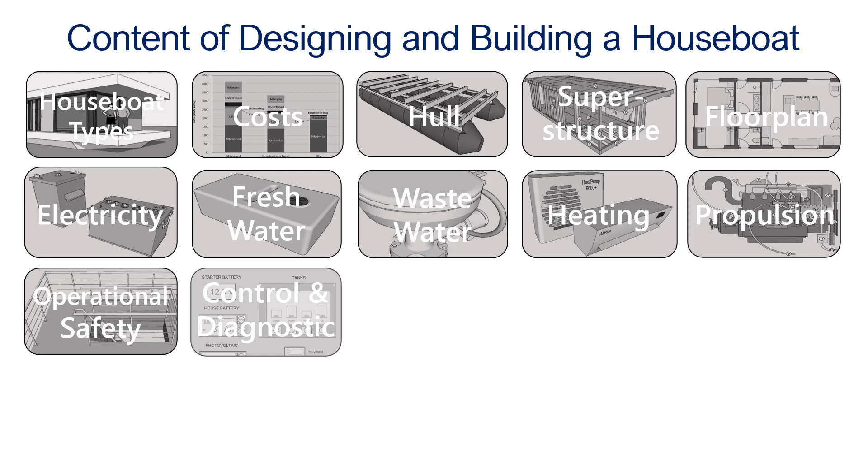So this is just a small presentation about little things I think are helpful. These are kind of the chapters of the book, and today we take something out of the area hull. I want to talk about providing safe freeboard and buoyancy reserve.

So it's all about that your boat is not too deep in the water and you have enough volume in the hull to keep you afloat in all circumstances.

Okay, let's take a boat here with some catamaran hull, two round hulls. It's somewhere, it's floating. Hopefully not too deep, hopefully not too high. If it's too deep, it's unsafe, if it's too high, you spend too much money on the hull.

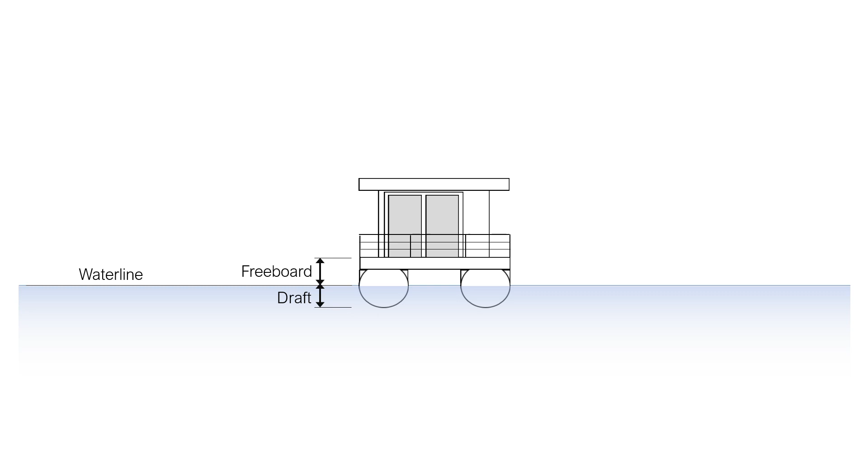So, but how do we find out where it is? We have a waterline. The freeboard is the distance from the waterline to the top of the hull where water potentially can run into the hull and cause it to sink. On the other side, you have the draft, from the waterline to the deepest part of the hull.

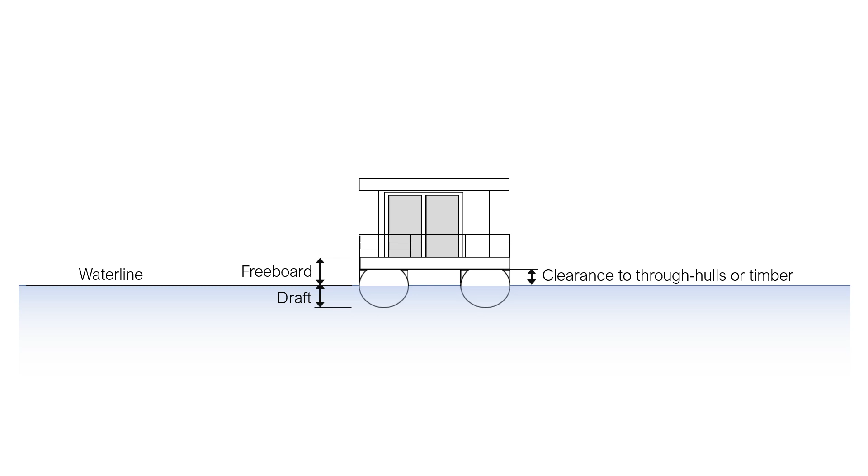Very interesting as well that yes, we don't want to have water running into the hull and into our living room, but as well we want to keep parts that can rot dry. So the clearance to any through-hulls where water can run in, or timber like cross beams, is as well important to consider. How do we calculate the draft and the freeboard?

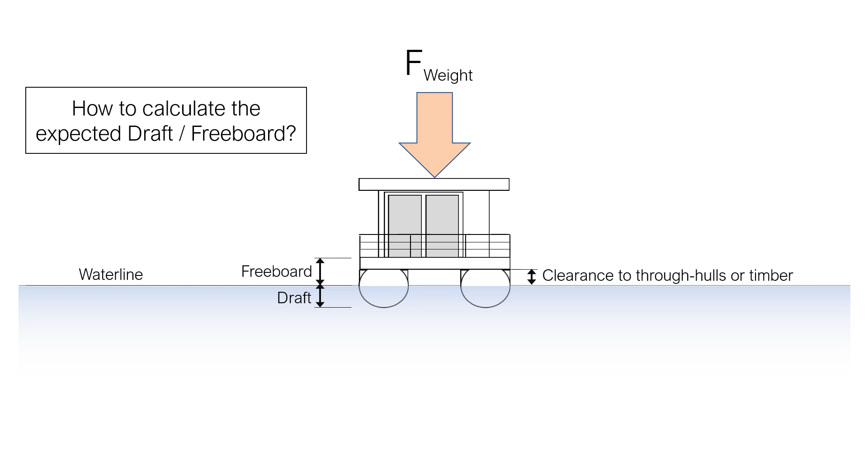So we have the weight of the boat. F stands for force, so the weight force pushes the boat into the water. On the other side, you have the buoyancy force pushing it out. So it's actually two forces, left and right, but for simplicity reasons, we make it one.

It's again a force F, and we call it buoyancy force, F buoyancy. A stable condition, that means the boat is not going deeper in the water, not going higher out, is when F weight equals F buoyancy. Simple, that's it, very simple.

And these forces are calculated in Newton. That's the correct term when you talk about forces. But in general, we make it a bit simplified and we just use the equivalent in kilograms. And 1 Newton is about 0.01 kilograms.

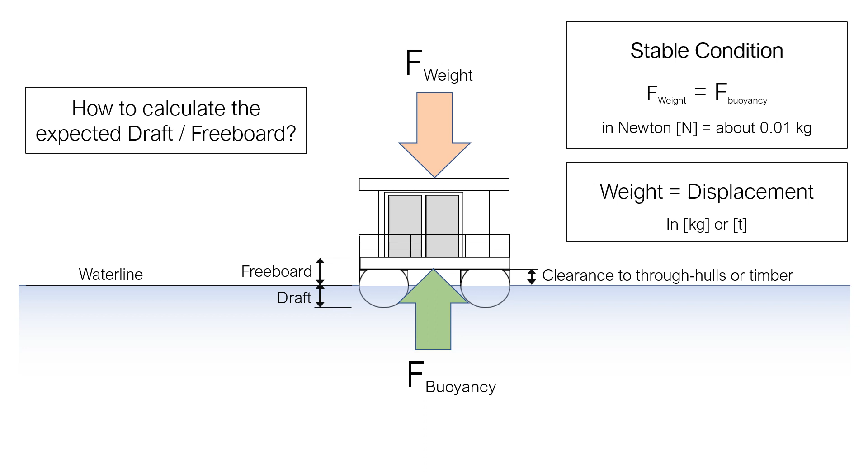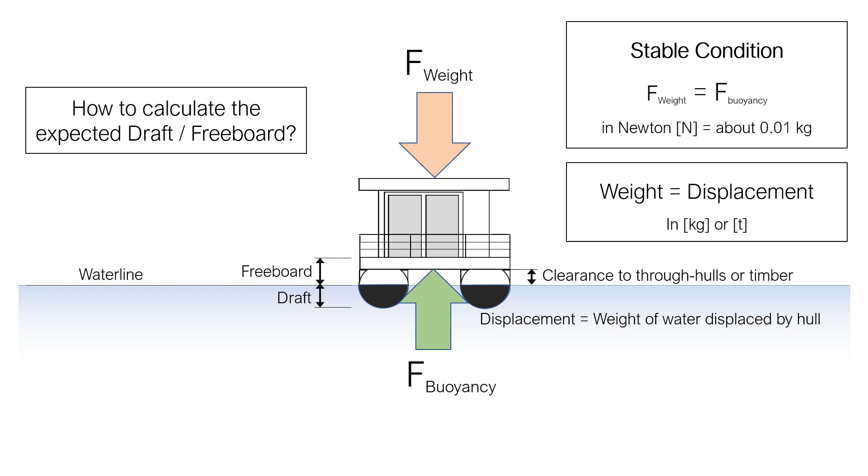Okay, weight is as well called displacement with the boat builders. And it makes a lot of sense if you know how to calculate it, because the buoyancy force is equal to the weight of the water which is displaced by the hull. And that's here visualized by the black part.

So let's focus. We have two things to solve: the weight of the boat and to calculate the buoyancy force. Let's start with the weight.

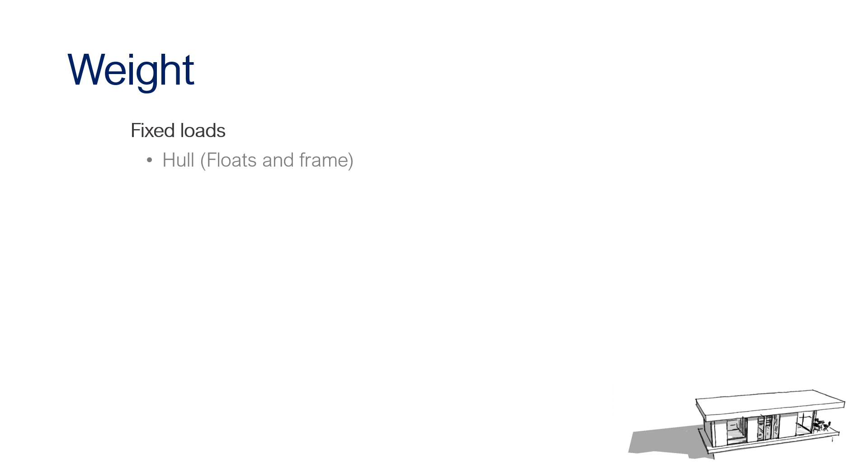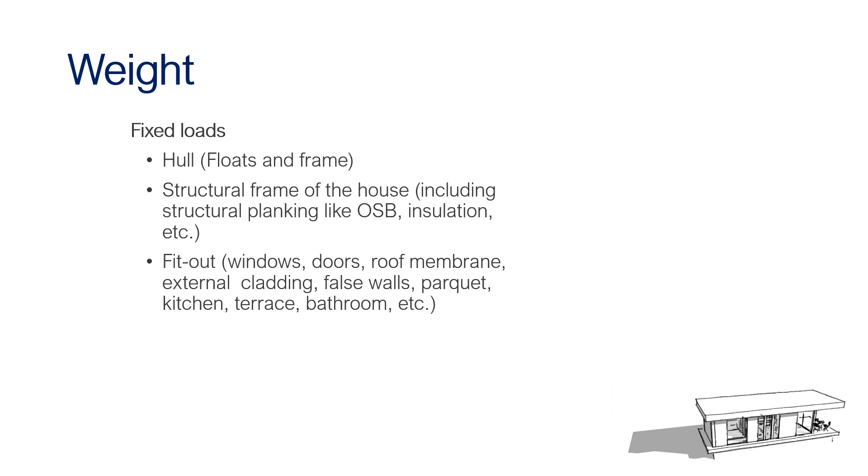We have to consider fixed loads. There's the hull, there's the structure, like planking, the beams, all that, even the insulation, and there's a fit out: windows, doors, parquet, kitchen, and technical installations, engines, batteries. And if you really think about it, there's quite a lot to it, and often things get overlooked.

Talking about overlooked or underestimated: variable loads, passengers. Yeah, that's easy to calculate, maybe average of 75 kilogram per person. Furniture - people underestimate how heavy furniture are. Personal belongings - there's a reason, there's a joke with sailing boats that the waterline gets always moved higher every year because people just put more and more stuff on the boat. So personal belongings is as well often underestimated.

Tank content - think about 1,000 liters of fuel or water, that's 1 ton, has to be considered. Snow, for people who, like me, live somewhere where it can snow, it can be quite a heavy load which has to be considered. So make sure you really have a good grip on how to calculate the weight of the boat. How do you do that?

So there are different ways to do it in a spreadsheet. You can do just a general top level calculation where you just list the main components of the boat and you estimate, or maybe someone who builds it for you gives you the weight, but this is not that accurate. So we have to work with a high contingency.

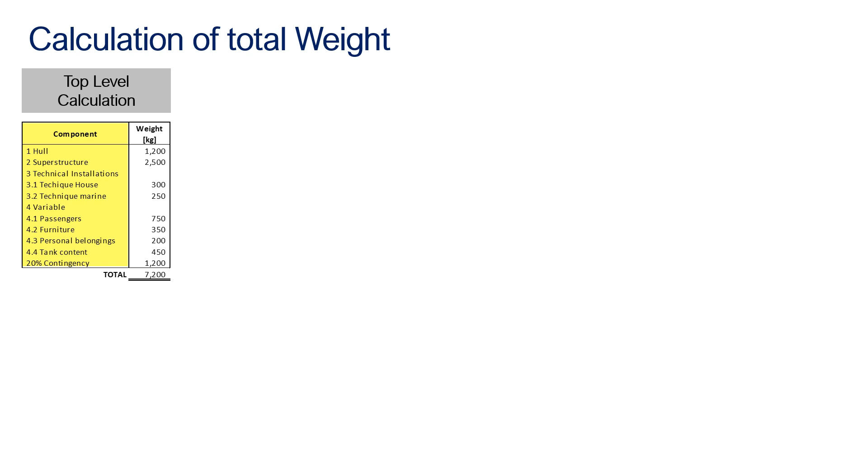For everyone who's really into buying, building, or designing a houseboat, I would really go a bit more detailed with calculations. You have again on the left the groups or components, hull, superstructure, and so on, but you really go down into the parts. This is something I talk about in my book as well. This part list is really important because you have to know what you have to order, so I would include even things that don't weigh that much, just list everything you can think of.

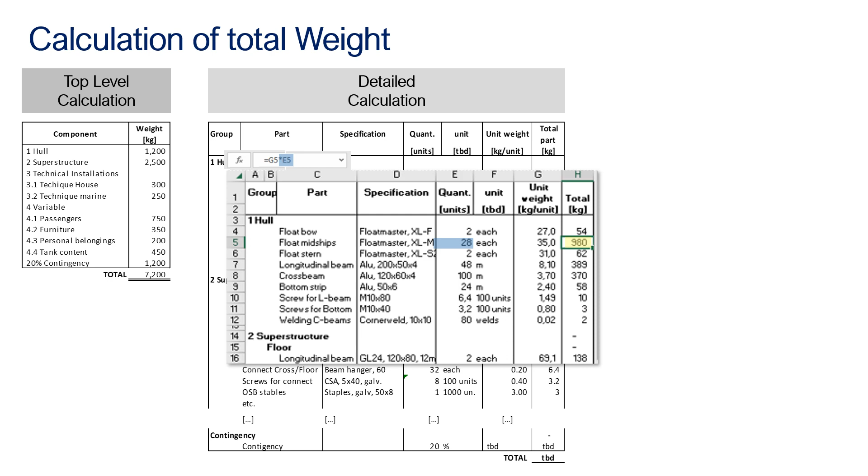Write down the specification, you need it later for ordering anyway. The quantity, unit, so how many units of each, how many pieces or square meters you have to buy, the weight of each unit, and then you can calculate the total of each component or each part. Simple calculation in Excel where the total is just the quantity times the unit weight.

Very simple Excel calculation. You can as well have a mixed calculation where sometimes you stay top level, sometimes you drill down, and you can use helpful numbers. In my book, I calculate for instance the weight of a typical floor, a typical wall, a typical roof with different kinds of insulation, so you can use these measures and then only have to calculate the square meters of roof or walls you have. For internal walls, you can work with linear meters. Whatever it is, don't forget your contingency, because you will surely have forgotten something, and as time goes you get more precise.

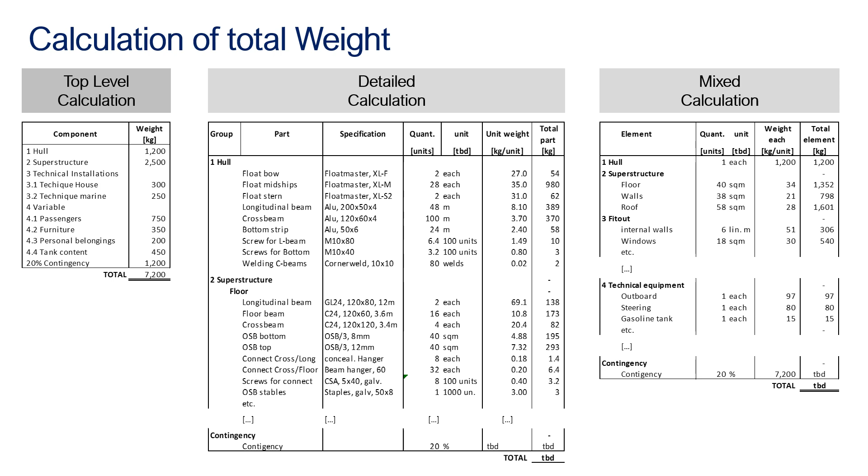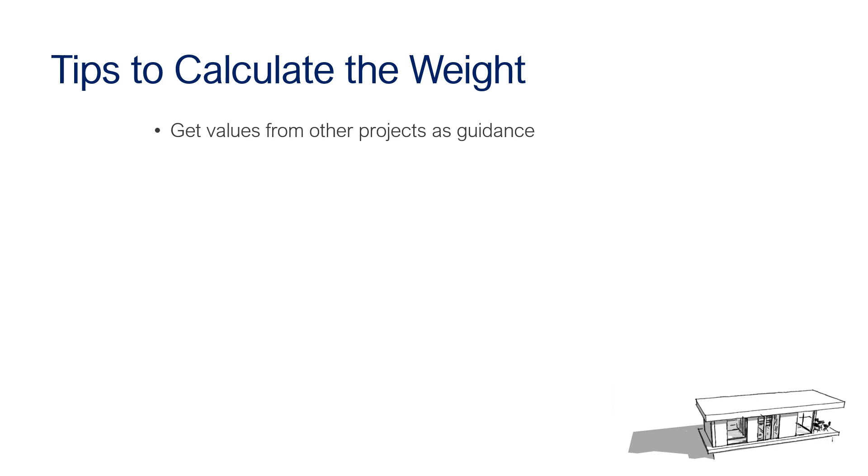Some tips from me: get other values from other projects. If you have a houseboat which kind of resembles what you have in mind, see how much that weighs, because chances are you will end up in the same weight range.

Go through the construction process in your head. Think about, okay, I do this beam, how do I connect it? Okay, I use the beam hanger, I need the screws, okay, insulation, wait, I have to have a membrane outside. So go through it and detail your part list so that you don't forget anything.

Start top level, so even if you don't know exactly how you will do, say, the roof, make an estimate, and as you go just detail the roof beams, the insulation, the roof membrane, and so on. My tip is just include everything. Even if it doesn't weigh that much, later when it comes to designing and ordering, you will be very appreciative that you have a complete list of all the parts of the boat.

And again, don't forget the contingency. Often people think they don't need that much contingency because they're aiming to buy a cheap hull and they know the buoyancy is limited, but chances are it will be heavier, so don't forget your contingency, and rather overestimate than underestimate.

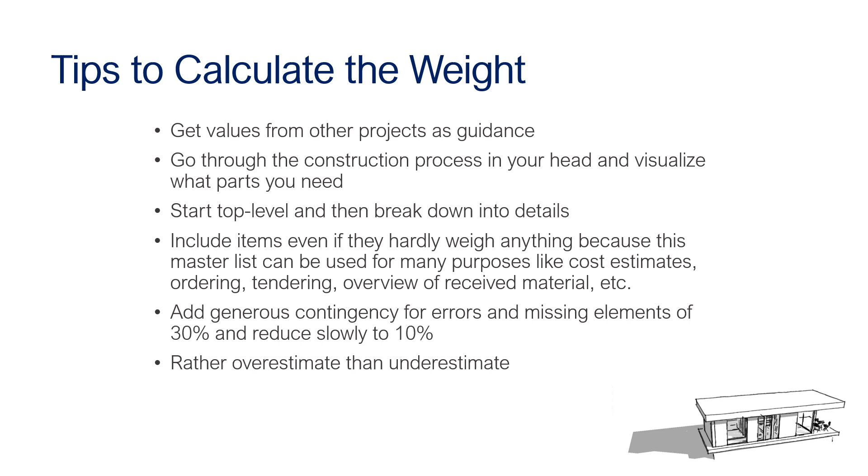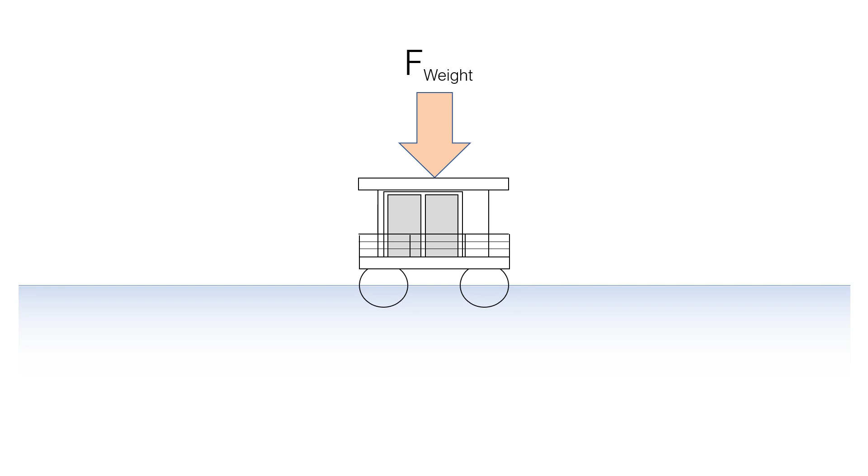All right, so we have the weight force. Now we have to calculate the buoyancy force. But this is a bit of a tricky thing because we don't really know where the houseboat is, how deep or how high it sits. Depending on how deep the boat is in the water, it changes the buoyancy force, so we have to know exactly where the buoyancy is.

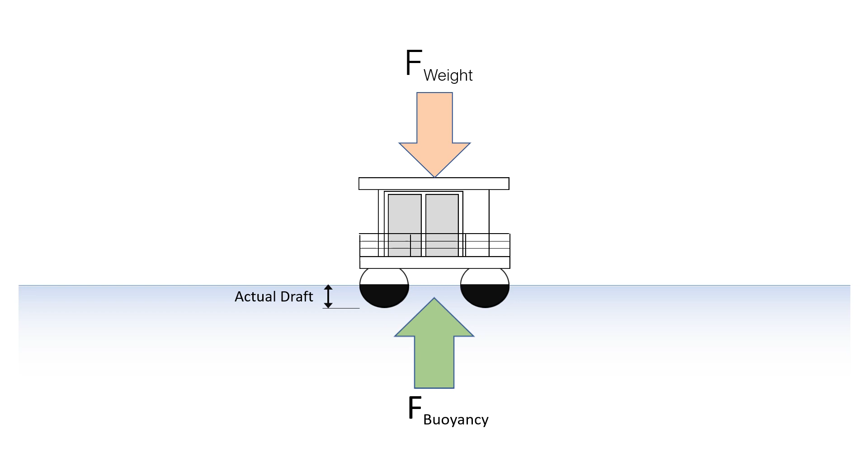Equal to the weight force, and this is given at the actual draft. This is the draft where the boat will later in real life float. So how do we determine the actual draft? Let's look at this hull a bit closer. It's just a round hull, composite, HDPE, something round.

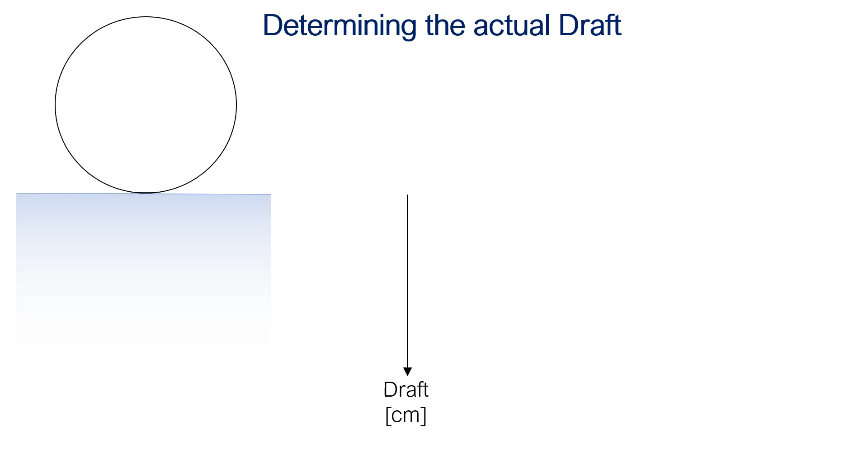So what happens if we now push this hull into the water and observe the displacement? It is the volume of water displaced, and the weight of that water is the displacement in kilograms. Let's do that together. Let's push it in and record the volume of water. First it rises steeply, and now as the round hull gets a bit narrower on top, the displacement rises not so much. It's a critical range, the last 10-15% of a round hull.

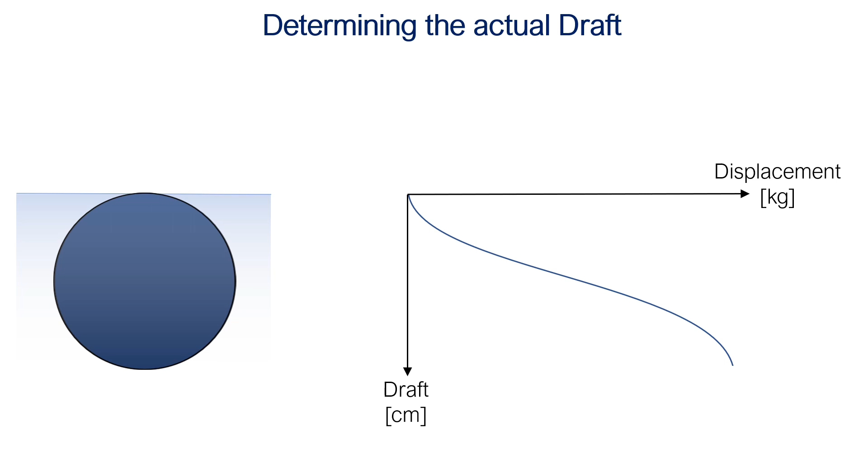So now we have a buoyancy curve, a displacement curve, and if we mark on this axis the weight of the houseboat, go to the line of our displacement curve, then we find the actual draft.

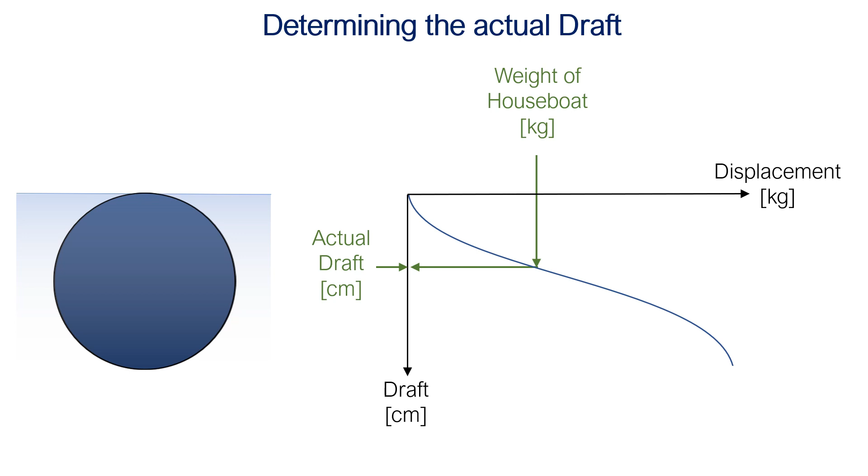So the thing is, we have to create a displacement curve. There are a few ways of doing it, and I will run through all of them.

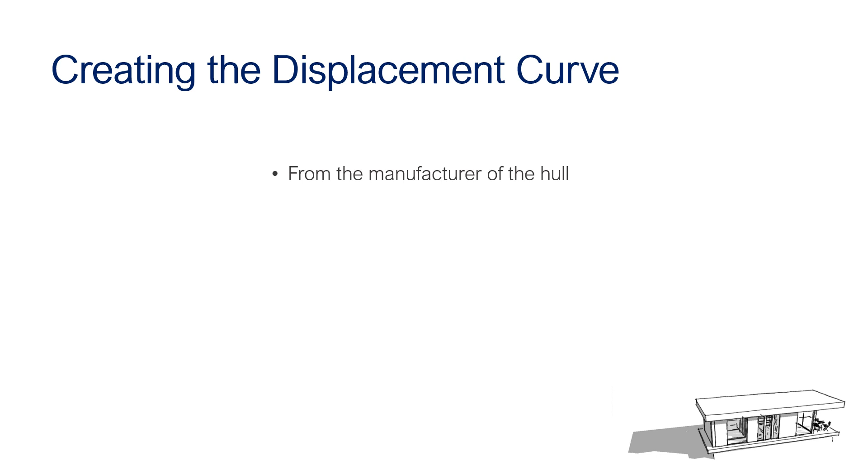You can get it from the manufacturer. If you have a prefabricated or a designed hull, they will give you a curve. You can calculate it from a 3D model. You can measure it if you have, for instance, an existing hull. You can calculate it from fixed dimensions. You can calculate it by parametric calculations. So I will go through all of that.

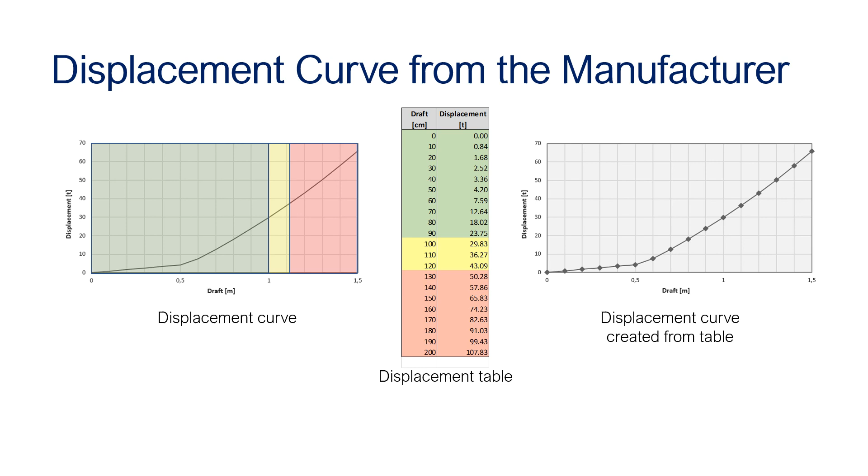First, displacement curve from the manufacturer. That's the easiest way, and very often people opt for a pre-manufactured hull. You get either a curve, sometimes color-coded to tell you the no-go zone where it's unsafe. There's a yellow zone where you don't want to go, and you try to operate most of the time in the green zone, or they give you a table. You can also convert the table into a curve. Same thing, but different. That's the curve for when you buy something from a manufacturer.

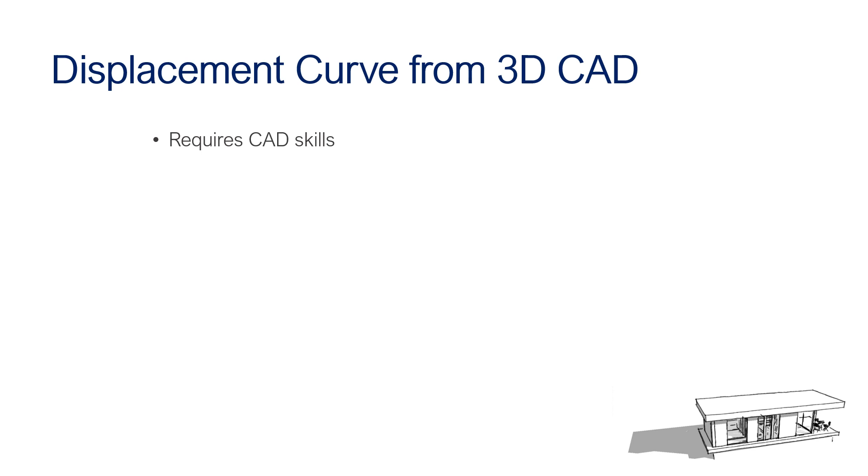3D - nowadays a lot of people use CAD, computer-aided design. It requires some skill, but it's very rewarding because you see what you design, how it will look like. It gets the most accurate results. The downside is it's a bit hard to modify your hull.

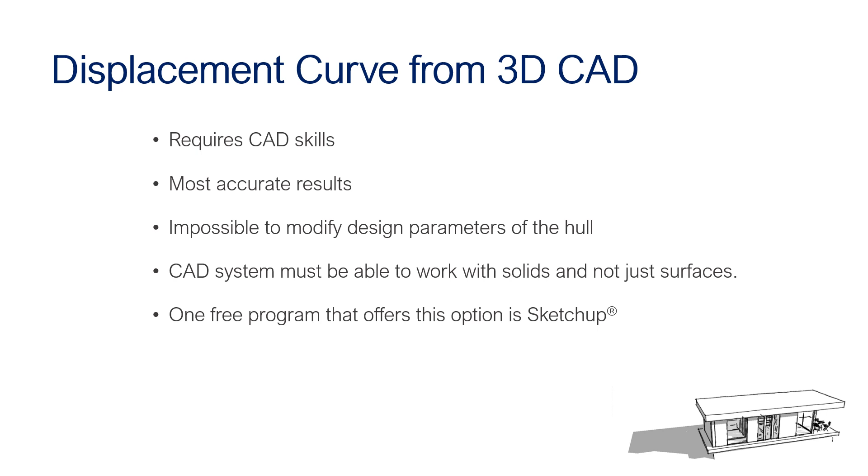Often these complex designs are not that easy to really modify. You can stretch, you can modify, but it's not that easy. That's a bit of a downside. We need a program that can work with solids, not just surfaces. I often use SketchUp. It's a free program, but I can't believe it's free because it's so powerful, and it does the same thing that many expensive programs do. So what I show you now is from SketchUp 2017, I think it's the last free version you can download, but all older and newer versions do the trick.

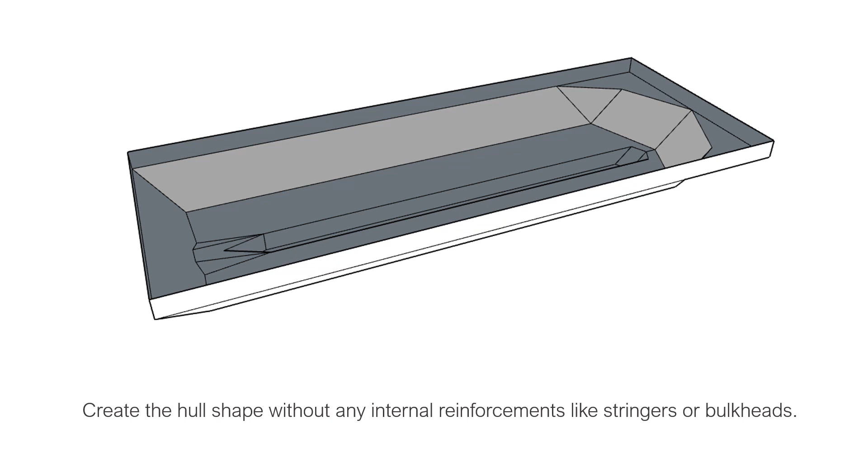You click it all and make it a group so it can't be changed that easily. Then you deselect the group again and create a surface bigger than the hull, which represents our water surface. By the way, this is a simple way of doing it - other programs might have easier ways, but this is how it works in SketchUp.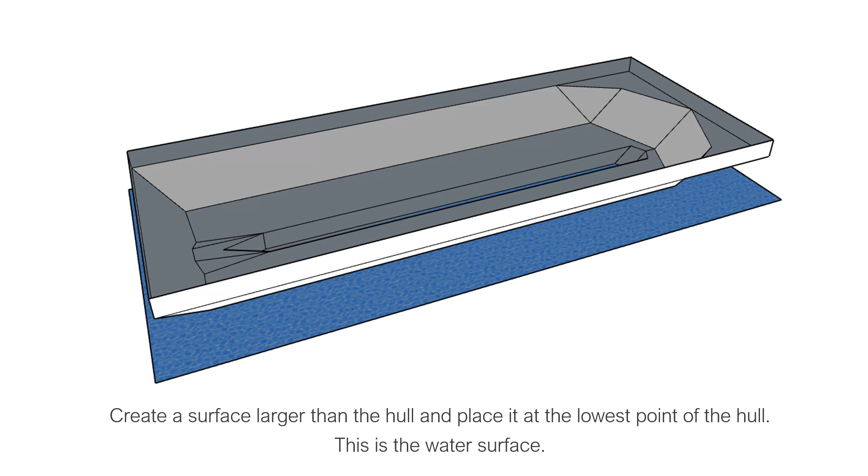If you have some better solution, let me know, but this works for me. So now you have the hull and the water surface. You select the water surface - you see it's getting blue, it's selected - and you move it to where you want to measure the displacement. So here I moved it up, I don't know, 70 centimeters.

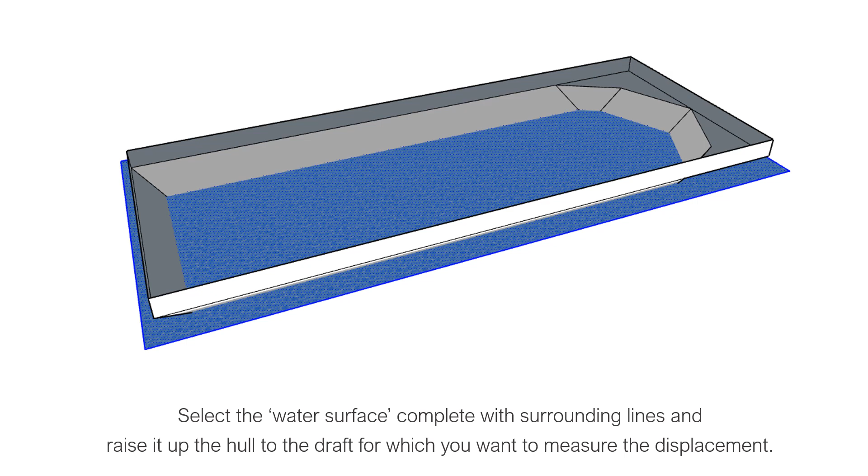Now we cut it out, open the group from our hull, and paste it inside. Then we select the whole thing. So now the group is open and we have the hull and the water surface in the same sphere - they're all in the same area, in the same group.

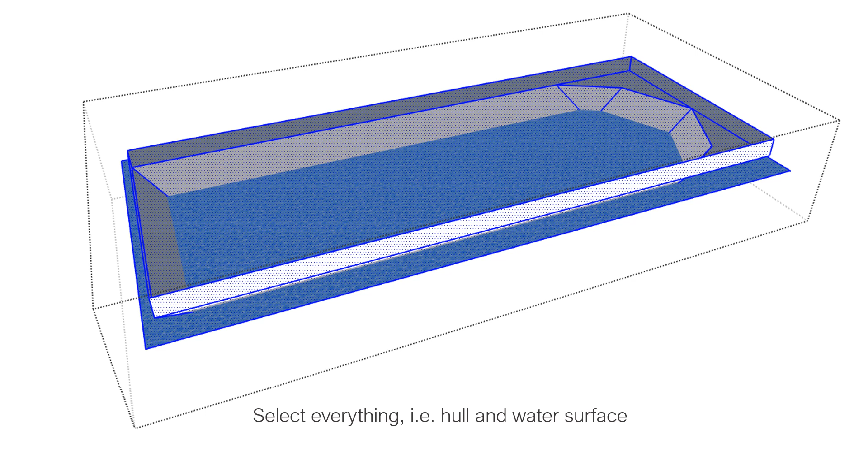Now there's something very cool SketchUp allows us to do - it allows us to intersect the water surface with the hull. So if you select everything, the water surface and the hull, right mouse click and choose 'intersect faces with selection.' Once you move it, have a look where the water meets the hull. At the moment there's no line, but once you click with selection, you see there is now a line.

So SketchUp now created a line where the water surface meets the hull. If we now delete all the things above the water surface and from the hull around it, we're left with the volume of the hull that's under the water for this particular position of the water surface.

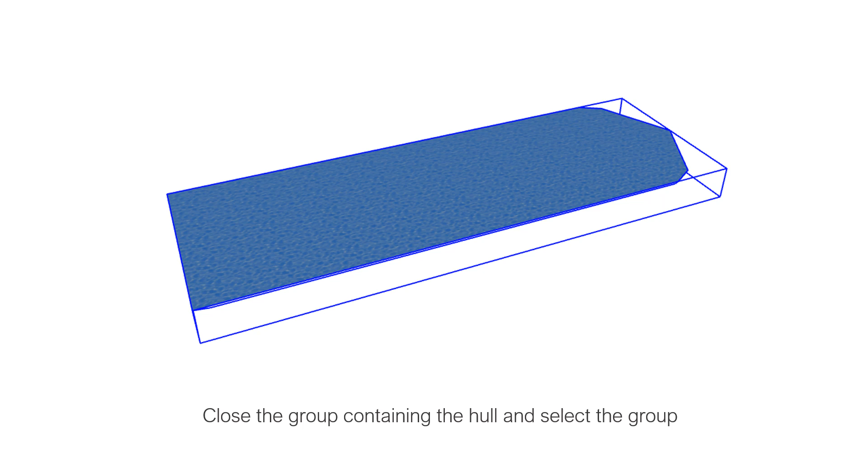This is now equal - 26 cubic meters is the same as 26 tons. That's the displacement of this hull at this position of the water surface.

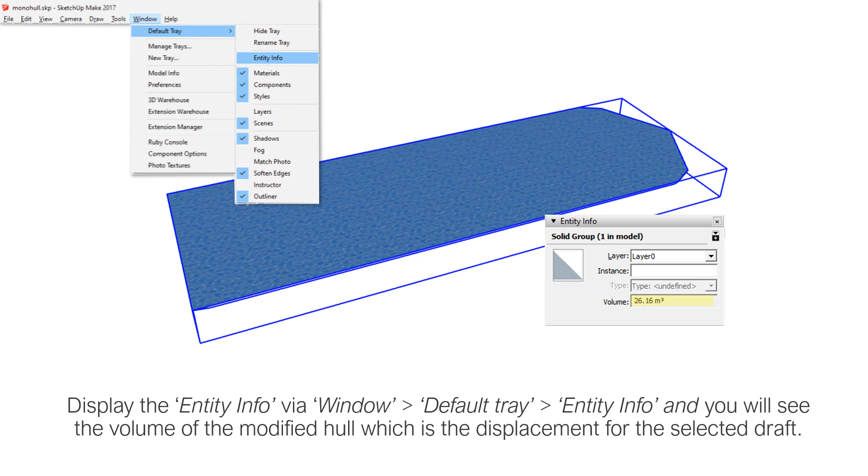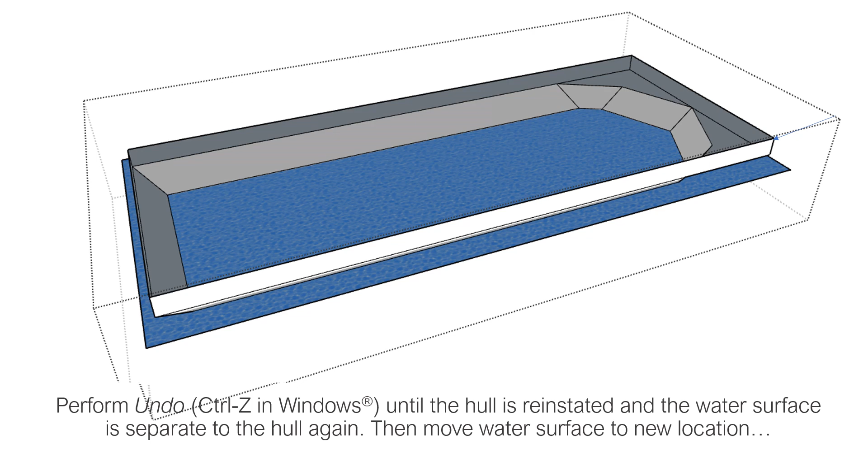If you want to choose more positions to calculate more points on the water surface, you just click undo in the menu, or in Windows use Ctrl Z, and do so repeatedly until the surface is again outside the volume of the hull, so the hull is not intersected with the water surface anymore. Because when you move the water surface to a new position, you have to intersect again.

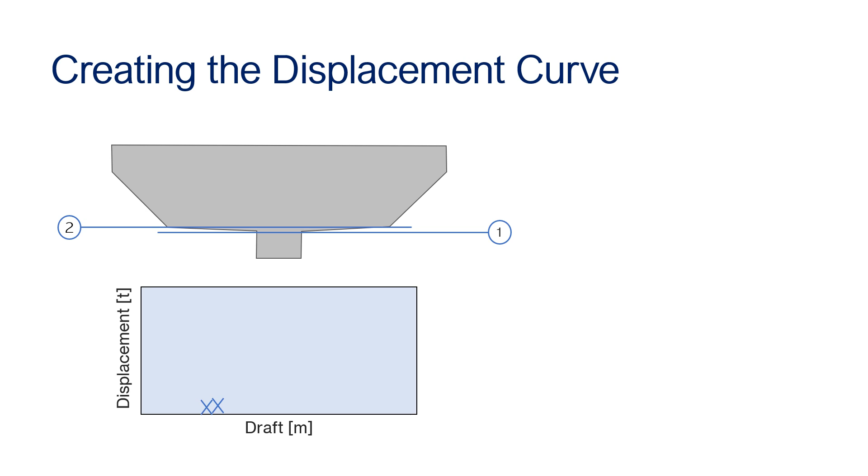So to create a displacement curve, you have to do this exercise at a few positions, but not too many. Looking at this hull with its square edges, we know the displacement changes linearly when there's no major change in the hull design. So I'd recommend measuring displacement at the end of the keel, where the lower part kinks up to the sides, where the straight surface of the hull starts, and at the top.

That gives you 1, 2, 3, 4 points in the diagram below, and because we know the displacement changes linearly between them, we can just connect them and have our displacement curve.

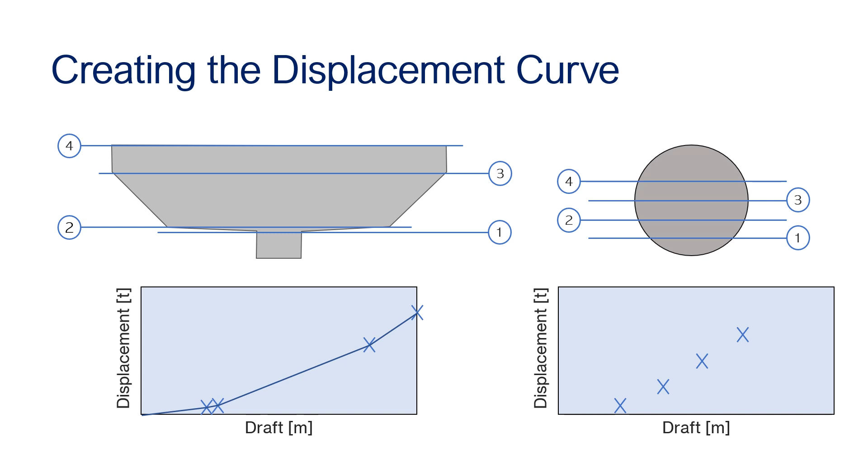You can do that as well with round shapes. There I'd space the points a bit more evenly - like 4, 5, let's make 6 points. Here the displacement will not change linearly, so when we connect straight lines, it's not 100% accurate.

When you do it in Excel with your results, you can smoothen the line out, but even with straight lines the result is quite good. For just designing and knowing where your house will float, this is more than accurate enough. But if you use Excel, you can smoothen the line and get a very accurate displacement curve.

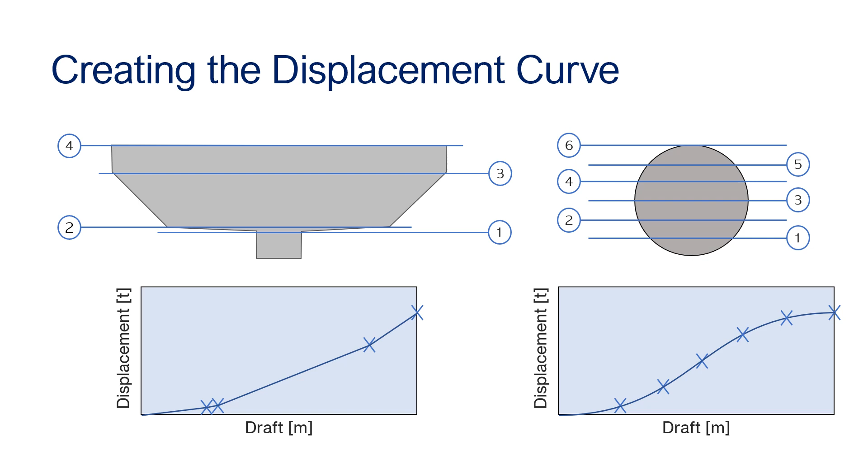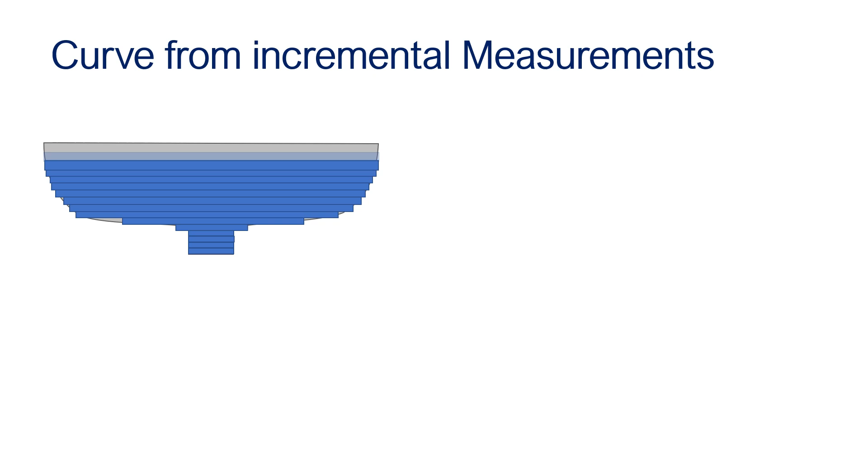Curve from incremental measurements: if you have a hull - which matters most when you buy something secondhand with no documentation and no displacement curve - how do you do it? You measure every so often the width and length of the hull. I'd recommend every 10 centimeters, measure that and put it in a table.

So the draft is calculated from the lowest bit of the hull, and every time we measure width and length. The displacement we can calculate by multiplying the width times the length times the increment we choose to measure - in this example 10 centimeters, so times 0.1 meters - plus the displacement of the increment before.

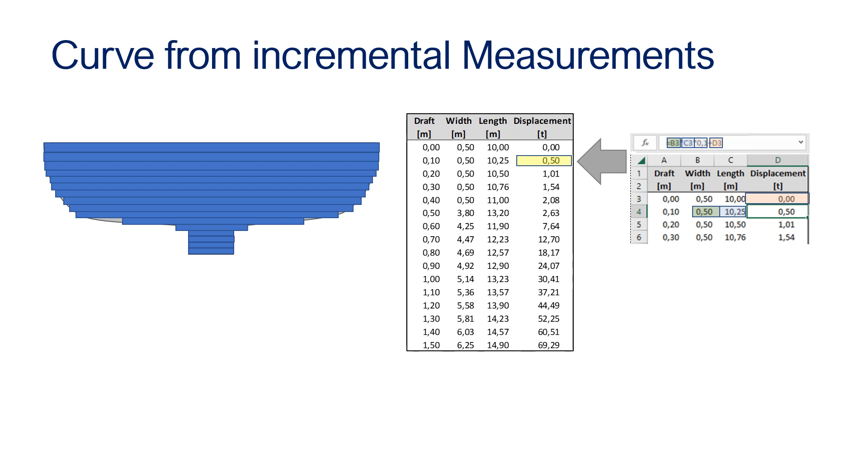So you slice the hull up, calculate the volume for each slice, then add up each volume with the others, and that's how you create this displacement curve.

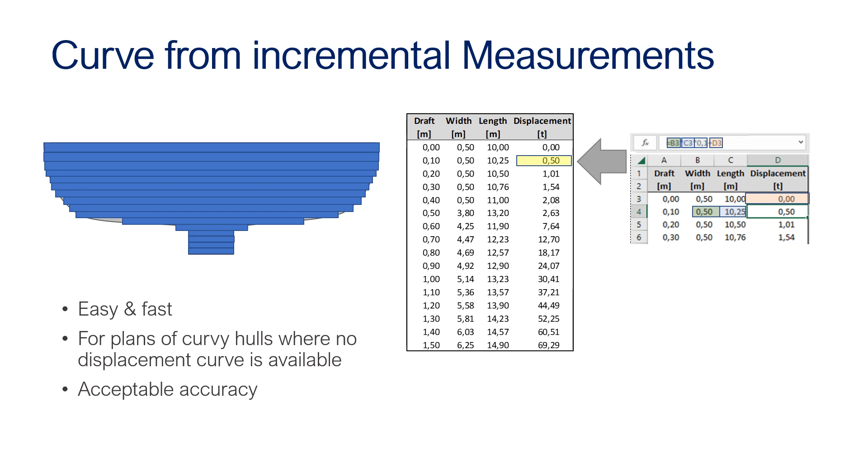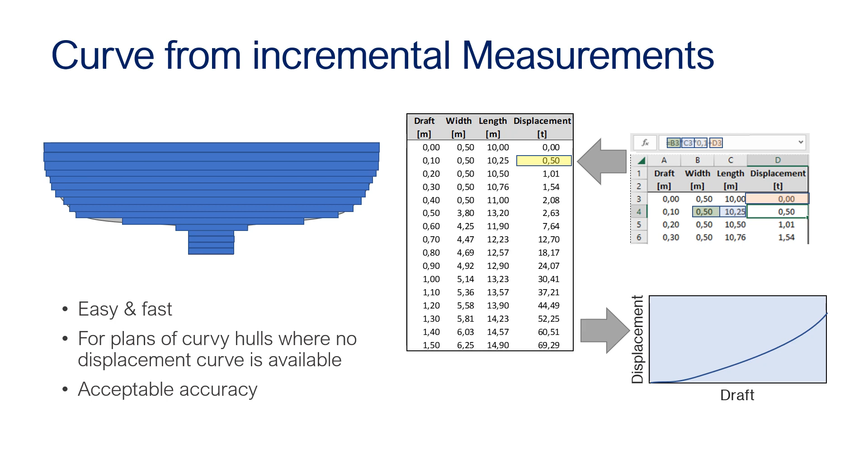This is an easy and fast way. It works for hulls that are a bit complex, like curvy hulls, or old ones where you don't have a curve documented. The accuracy is really quite good - if you put this table into a curve, it gives you a very nice and quite accurate displacement curve.

Now we get a bit more technical and interesting, because often what happens is you have shapes where you maybe don't want to go out and measure every 10 centimeters, or you don't want to build the whole model in CAD, so you can actually calculate it.

This requires some mathematical skills - it's very accurate, but hard to use for non-standard shapes. So if you have a boxy shape, square, or one with very few angles, or a perfect round shape, it's a very nice way to use calculation, but nothing too round and too crazy.

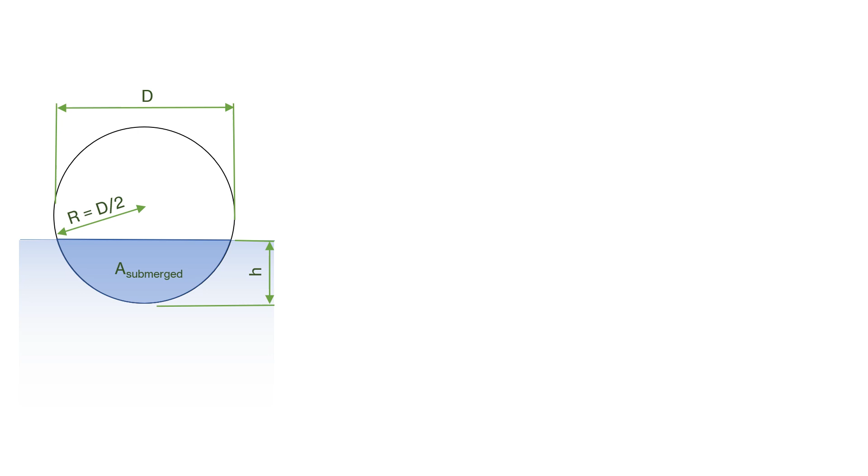And h this time is the draft, it's the height of this submerged area. Displacement, easy, is the volume of the hull under the water, calculated by the submerged surface. A is for area, it's the surface, times the length of the hull. Okay, so far so good.

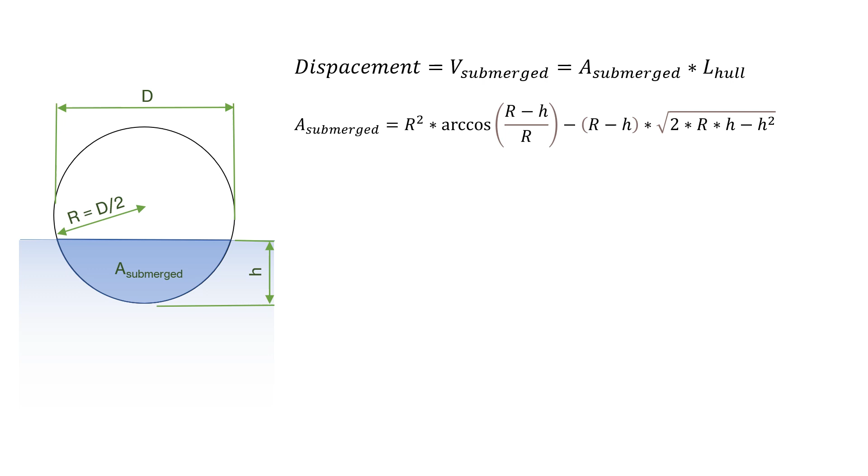Now it gets a bit more complicated, but this is the downside of the mathematical approach. If you look up on the internet how to calculate the submerged hull, you come up with an equation here. And this is how you calculate the submerged area. Now the displacement is just this submerged area, in the square brackets, times the length of the hull.

But now just one thing I want to add, n hull, n is for number, not to forget that for this boat we of course have two hulls. So this displacement is the volume of this round shape times the length of the hull, and then times 2, because we have two hulls.

Just a note, when you use these functions like arc cosine, sine and everything, make sure your program works in radians and not degrees. You can quickly check that by typing into your program, maybe Excel, the sine of 90 degrees. If it results in 1, you are in degrees, which you don't want. If the result is 0.839 and so on, you're set to radians.

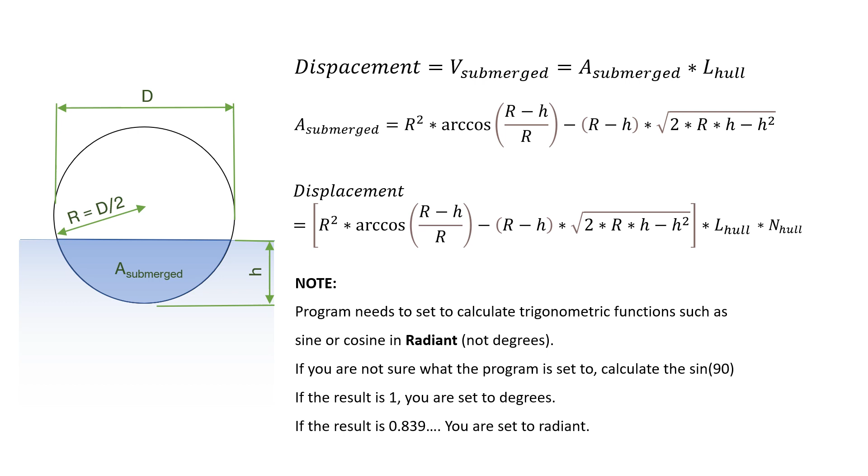In my book as well, I show you how you can swap from one to the other, from degrees to radians. It's not that difficult, you work with pi and all that. But for now, I just assume that your program is in radians.

When you enter the variables into this equation, you have to be careful with the units you use. So if you want to calculate the displacement in tons, you have to use meters for all dimensions. That's how this equation on top works.

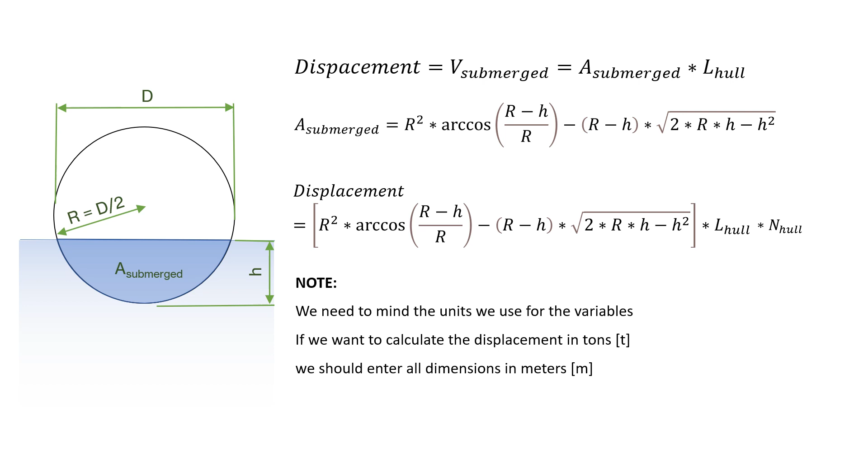So let's look into this in a bit more detail, how it works practically. So we create an Excel table, and we put the draft on the left side, and then in the box on the right the variables. So it's like the kind of parameters.

So this time we have the diameter, the radius, the length of the hull, and the number of hulls. And you see as well here on top how this equation translates into an equation in Excel, for instance. But you can also use any open source or other spreadsheet program.

So you put that in, and you can now use this table and move it down. Before I go down, I just want to tell you that please note, when you use in this equation a variable that will always stay at the same spot, you have to put a dollar sign before the relevant row.

So you see, for instance, in the equation it's $4. So $4 is the radius of the hull, and we always want the equation to refer to row number 4, because I'll now show you a trick how you can move that equation down to all the other lines, and we always want the equation to be updated with all the other variables, but not with the ones in the parameter.

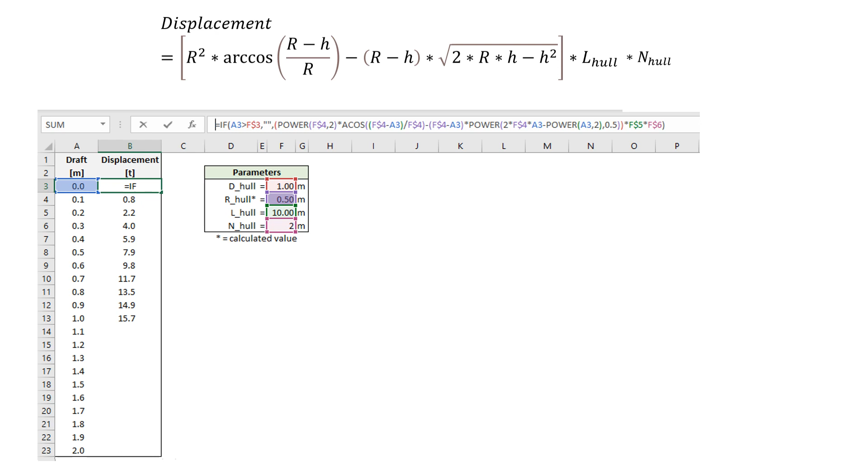So this one you can just mark here. I made it in yellow, the if function. You can use, for instance, Excel to translate this table into a curve.

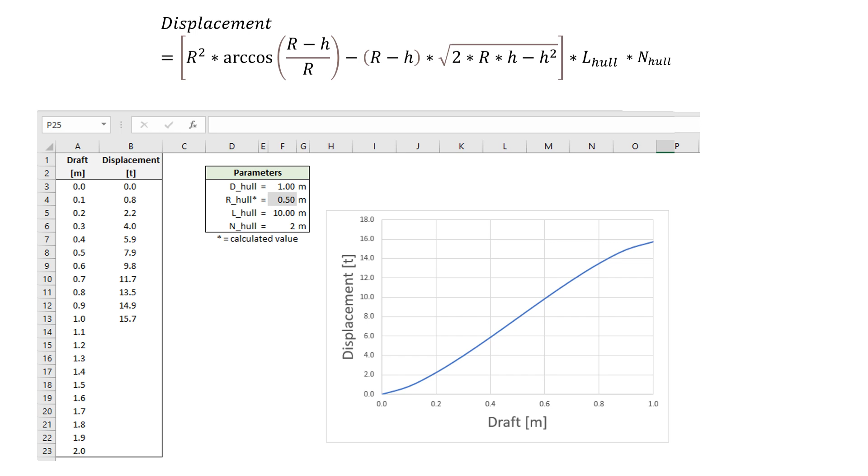You can make the increment smaller. I had it here like every 10 centimeters. It's more than enough to calculate the dimension, so no need to go much smaller, but it's a very nice outcome, this typical S curve for a round hull.

Now let's do the same thing, calculate something with simplifications. Because let's assume you don't have a round hull, which is not that simple. Let's assume you have something like this, with straight lines, and you want to calculate it.

This has the advantage over the CAD file, that when you work with variables again, you can very simply modify the hull, because chances are you maybe have a hull that's too small or too big, and it would be easy just to change a variable and see what you have to change to make it work.

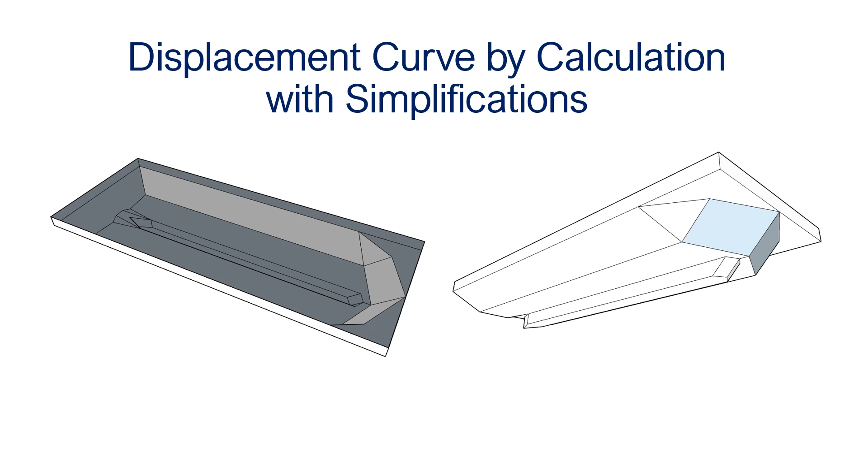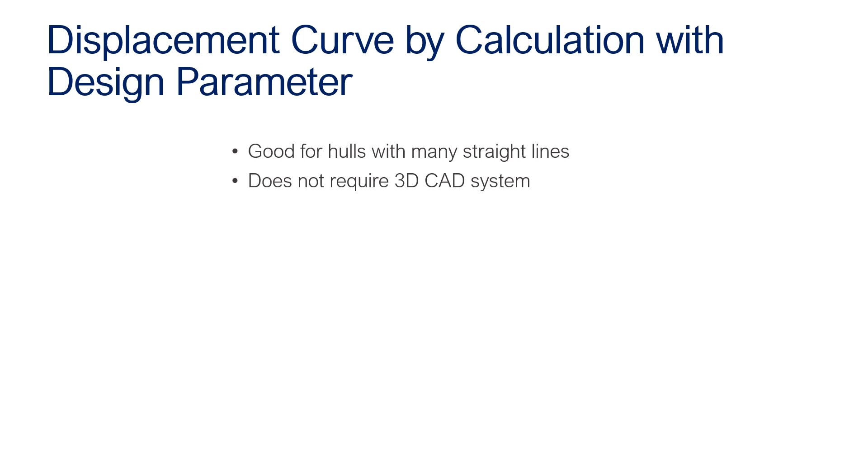So I'll show you a bit how you can do this. The advantage for this parameter design is you can use it for hulls with straight lines, and now for the calculation you don't need the CAD program, it's very accurate, and it allows you to modify the hull.

It does need some mathematical and geometrical skills, but I will run you through it now, step by step. I use Microsoft Excel, but as I said, other programs work as well.

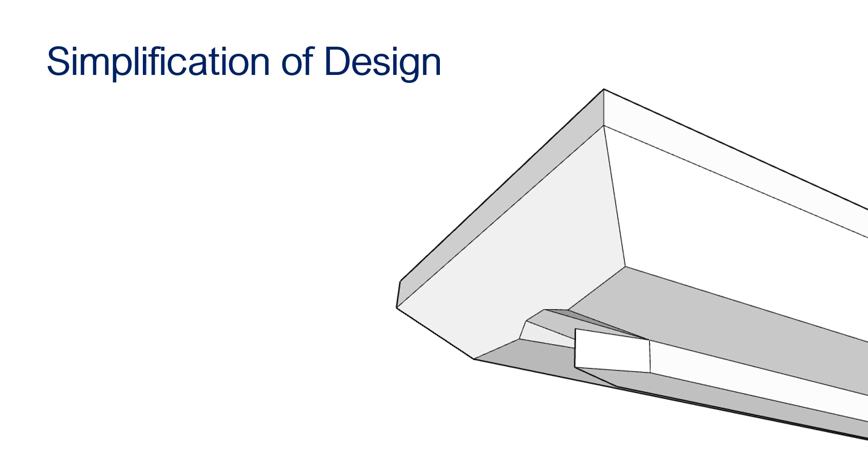Simplifying: you would go crazy if you tried to calculate all the little bits of this propeller canal and the tapered end of the keel for the propeller shaft. So just simplify it and reduce the number of curves, but try to balance the volume.

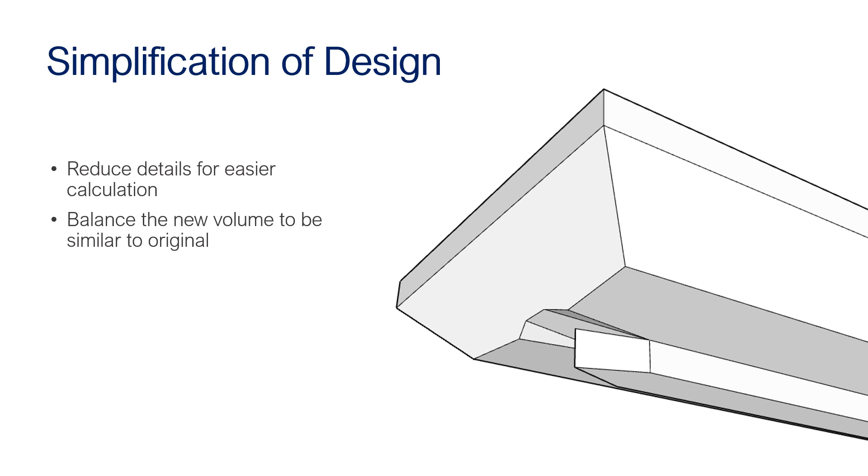The simplifications are very simple. It doesn't change much with the buoyancy.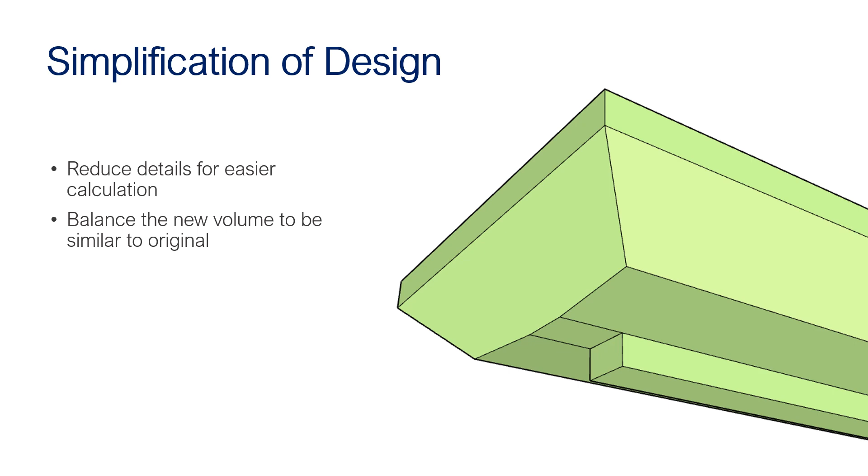Let's have a look what I would do with this bow. There's so many corners, so I take it slowly. You see, I reduce the number of kinks, make the keel boxy again, and it's the same volume. I will later show you how accurate it still is, nevertheless, to the simplifications.

Okay, we have to now chop our hull up into little pieces. We again have a lot of dimensions, and it doesn't matter what you call them, you just have to know what is what.

Make a drawing like I have here: width overall, width of the side, width of the lower bit, width of the keel, length of the keel. Just have all the variables. And now the chopping up.

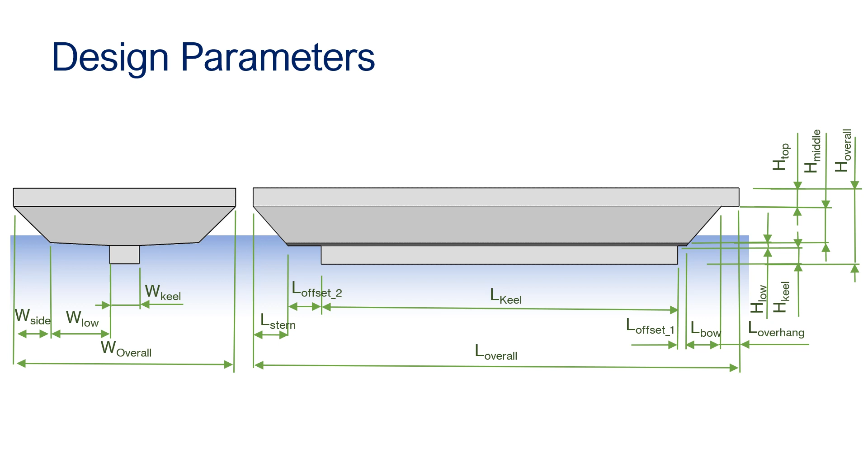Longitudinal: whenever the form of the hull changes, we declare a new area. So 0 is the overhang of the bow, 1 is where it gets tapered, 2 is the section before the keel starts, 3 is the long section where the cross section is constant, and so on.

You do the same as well across the hull. You see where it starts: C is in the middle with the keel, B is with the flat bit, A is on the sides, and you do it as well from the top to the bottom.

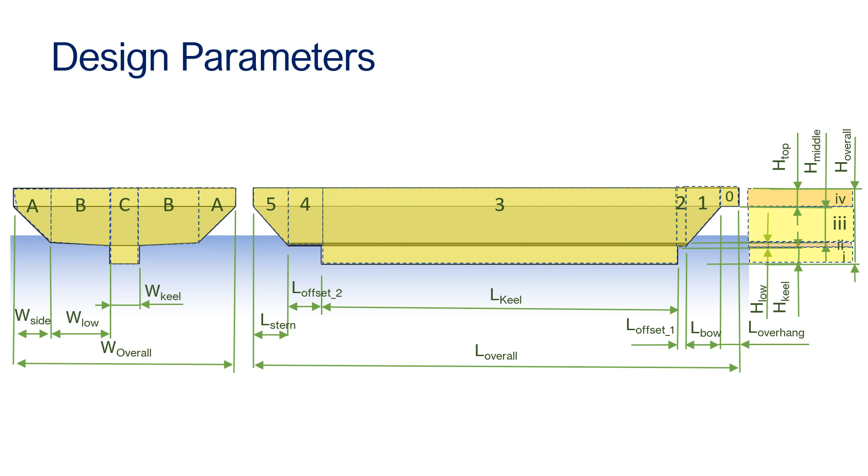Okay, so now I want to show you how this works with calculating the different areas and why we chopped it up in so many areas.

So this here is the section C3I, because C it's in the middle, 3 it's at the bottom in the middle where the keel is, and I that's where it's on the bottom. And if you look at it, it's just a square, and it's very easy to calculate: it's just the length of the keel times the width of the keel times the height of the keel.

Done, let's move on, let's have a look. This is now, again, it's in the 3 section in the middle. It's still in C, but it's now in Roman 2, double I, just above. And look at it.

It's really simple to calculate: the length of the keel times the width of the keel, times the height of the lower section. You see that on my dimensions on the right.

Let's get a little bit more challenging. Now we have the B side, left and right of the keel, still in section 3 and Roman 2. You have two square-like wedges that you can move over each other to form a square. Volume is easy to calculate: length of the keel, width of the lower bit, times height of the lower bit.

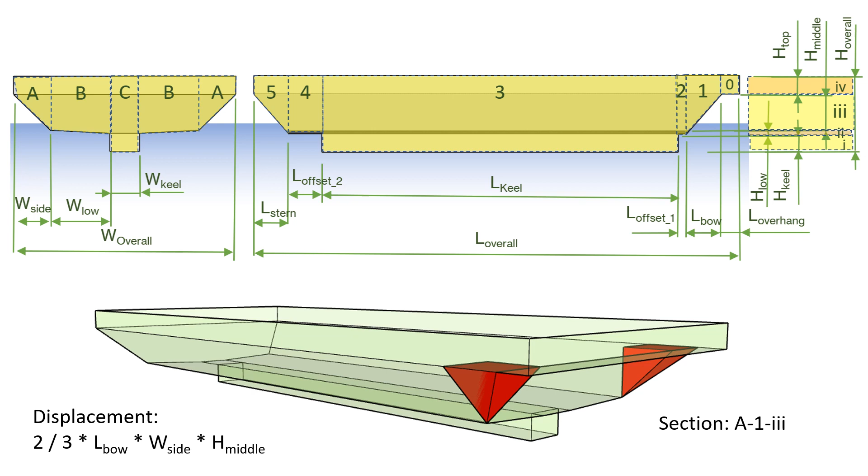So where does all this go? We create a table, and in this table we need all the different chunks of the boat. Here we see 0, 1, 2, 3 — these are the longitudinal sections. Highlighted in yellow is A, B, C, and we have A, B, C for each of the longitudinal sections. Then on the far left, the horizontal sections — these 4 sections — we have for each of the longitudinal and each of the cross sections. That's a lot of little volumes.

But if you think about it, a lot of these volumes don't exist, so they're blanked out. For instance, section 0 is the overhang of the front — in section 0 you only have something in Roman 4, only on the top bit. There's nothing below, nothing in Roman 1, Roman 2, or Roman 3. So in the end you only have a handful of volumes you actually have to calculate.

We spoke about that earlier, and I'll give you a few examples of how I typed it in. Here, for instance, Roman 4 I just merged into one big volume, which is just the overall length of the hull, the overall width of the hull, and the height of the top bit, with the vertical sides.

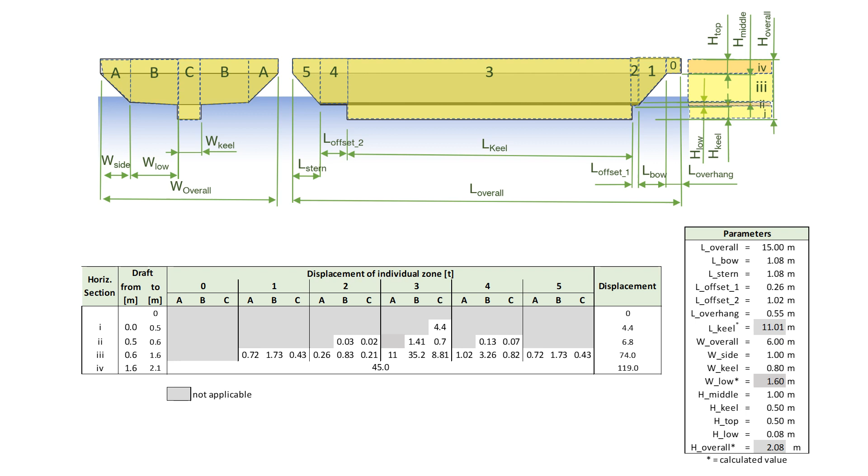Let's go further. We have now these displacements for the different sections, and we take the draft on the left where it always starts, and the value of the draft, and we put it into a curve.

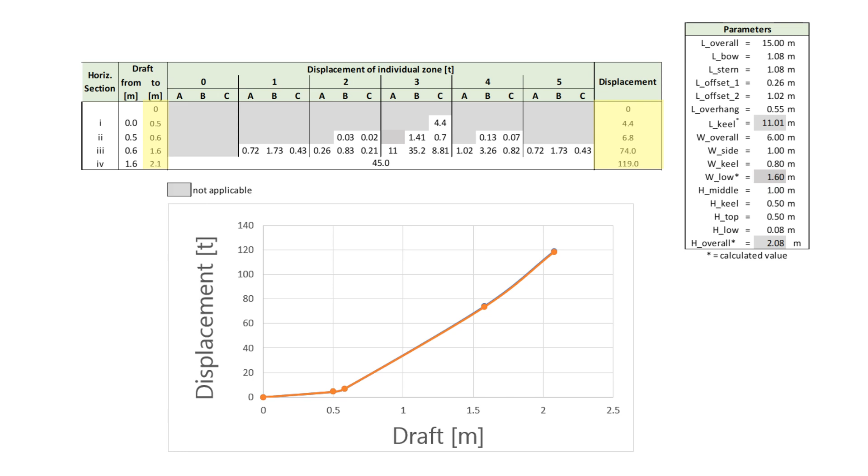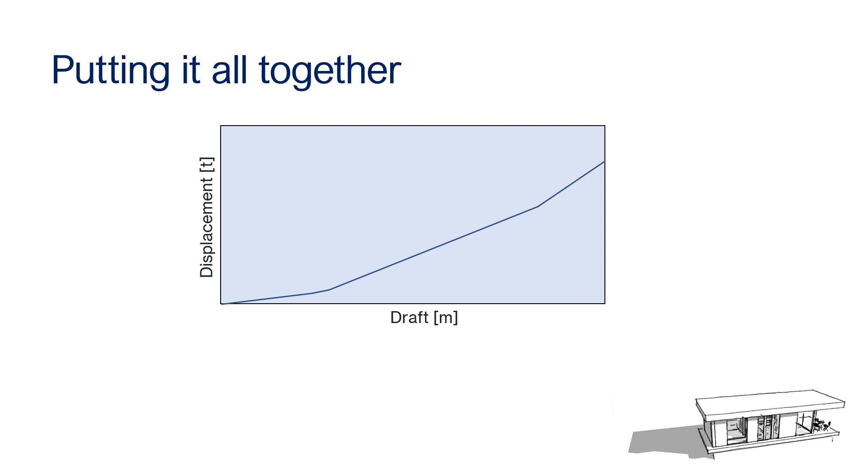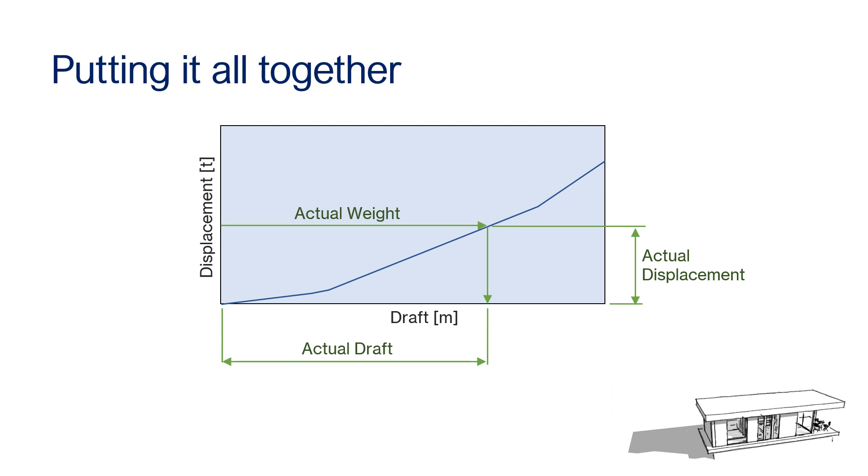Putting it all together, we calculated the displacement curve and the actual weight of the boat. With this weight, we can determine on the displacement curve the actual draft where our boat will float, and secondarily we know the actual displacement, which is the weight of the boat. When we continue the curve to the fully submerged hull, we can also see in this diagram the freeboard. So these are the basic figures of a displacement curve - how to read it, how to understand it.

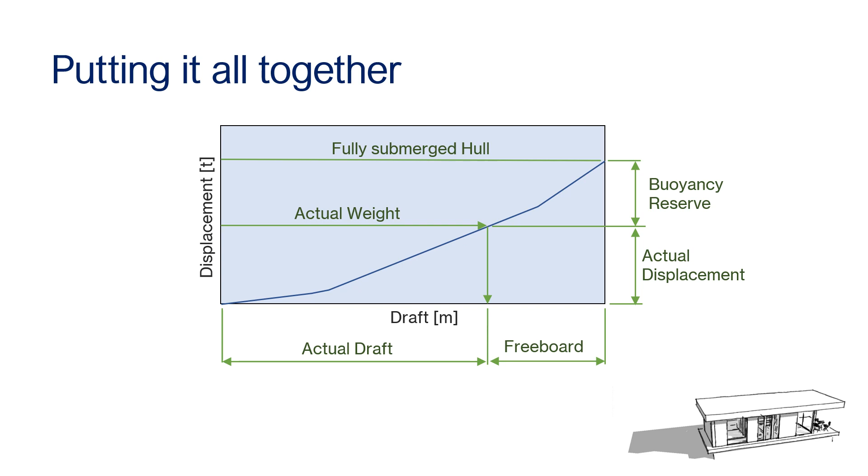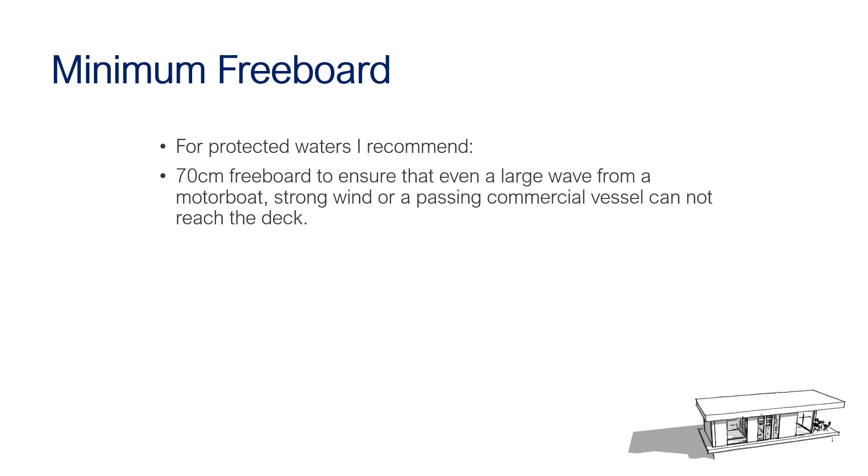So my recommendations: minimum freeboard. For protected waters, I know most of the time it's flat and glossy, but I still like 70 centimeters of freeboard. Imagine there's a big barge plowing past, or maybe even a stretch of water with bigger waves - you don't want water coming in. So 70 centimeters I think is very decent. If you have a construction like a catamaran with timber on the bottom which is exposed, I would really have at least 50 centimeters, so even if it gets occasionally wet, it can dry out. But the worst thing is, imagine 30 centimeters - that's nothing. If there are waves and it's constantly touching timber, it will rot, and that's not what you want for a long life expectancy.

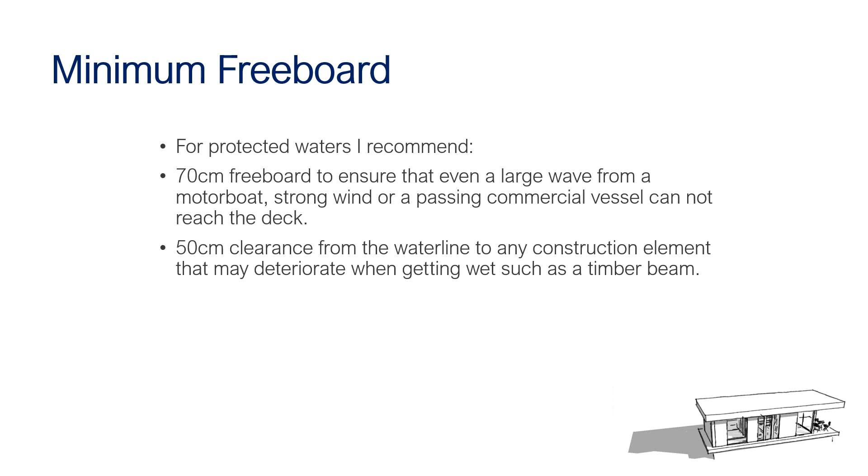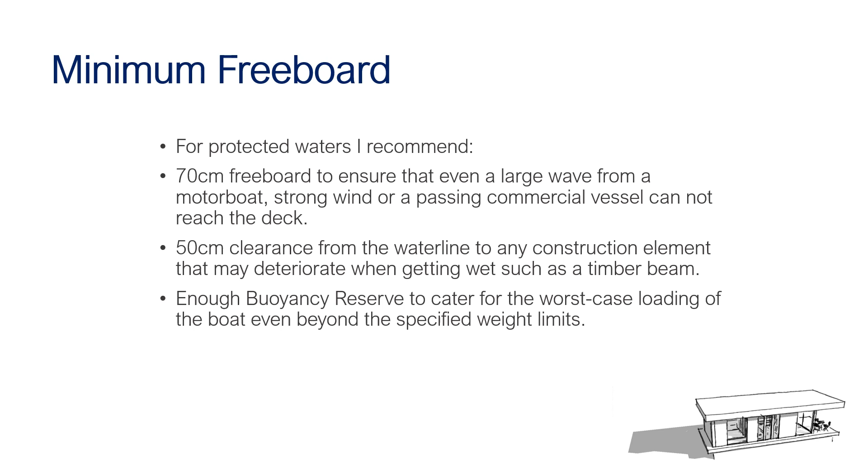Buoyancy reserve - this is especially important for round hulls. Make sure you have plenty of it. Even if you think you're in control and know how much belongings you'll have later and how many people will come, make sure you have more, because there might be a party with more boats, or the china you put in your kitchen is more than you think, or you put in a generator later, or some new parquet. So make sure you're on the safe side.

So what's next? First of all, I hope you enjoyed this tutorial and found it helpful. Freeboard is a very important bit - I see too many boats too close to the water, and I hope it doesn't happen to you. Enjoy the scoping and design process, it's really rewarding - you create your own boat, you will love it. But spend the right time in the designing process, because that's where you make the most impact.